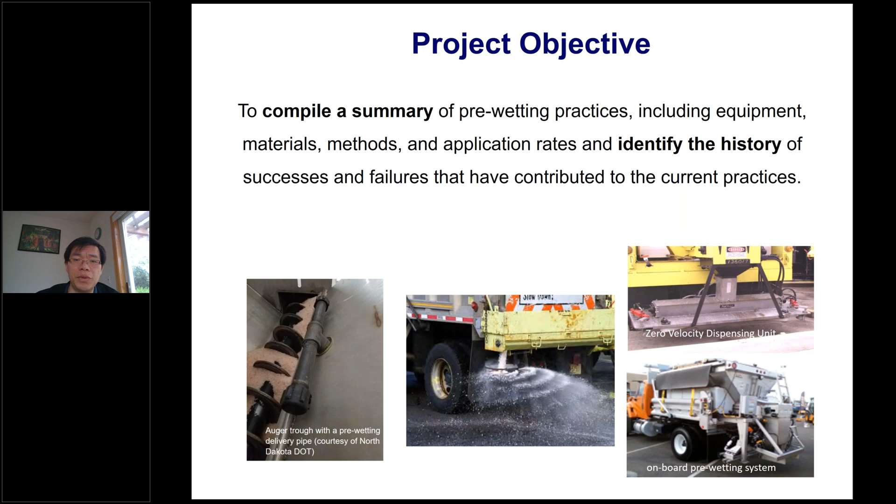Task 1, literature review, basically aimed to review publications from recent decades, looking at the most common practices, innovative technologies, and trends related to pre-wetting equipment, systems, and materials, as well as application rates, application tactics, and the appropriate methodology and equipment to use under various road weather scenarios.

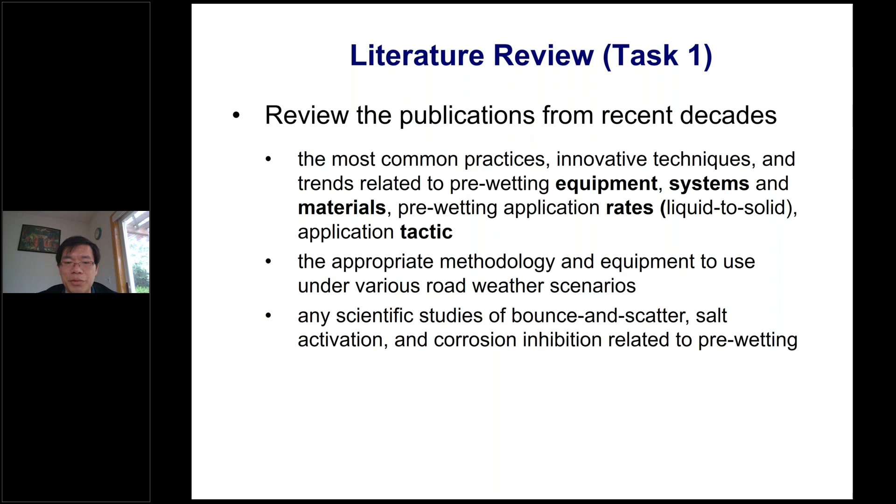For sake of time, I will combine and integrate all the findings into the final synthesis report, so I'll focus on the findings there. But here I'll just briefly go over each task and what was the original objective. For task 1, we also wanted to identify scientific studies of bounce and scatter, salt activation, and corrosion inhibition related to pre-wetting. Of course, if you recall, there's not much out there in the published domain in this regard.

Now task 2 was a survey we developed for online participation. It included Clear Roads states as well as some international transportation agencies. The goal is to capture practitioner insights, sometimes those not in the published domain. We also wanted to collect more detailed information about pre-wetting rates, materials, and equipment, and try to bridge gaps identified in the literature review, as well as collect any technical and deployment data where available, and feedback on what worked well, what didn't work well, and limitations of pre-wetting.

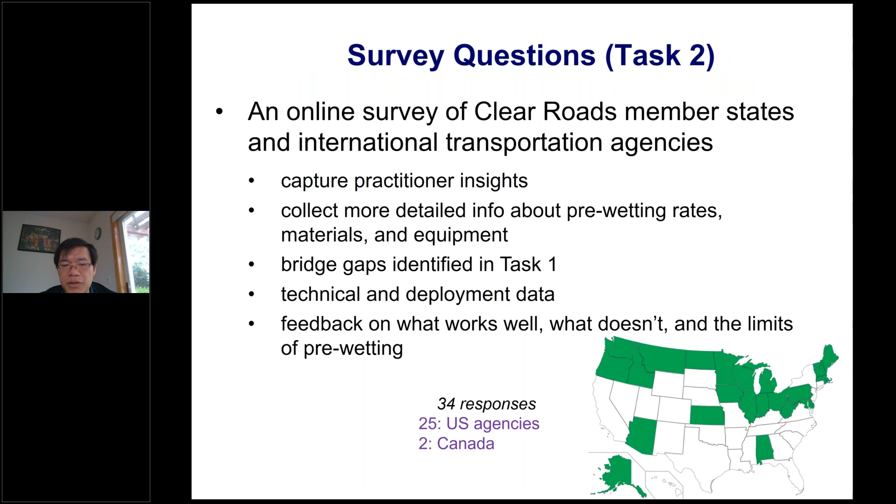So we ended up having 34 valid responses. These came from 25 U.S. agencies and 2 Canadian agencies. Of course, for certain agencies there was more than one response. The map shows where the responses came from, except the Canadian ones.

For task 3, based on what we found out in task 2, we identified a few responses where we wanted to get more details. So in the end we identified 9 case studies. These would provide examples of successful and optimum practices, and also provide sufficient detail for agencies to begin adopting new or adapting existing practices. In the proposal, it was promised 6 to 9 case studies.

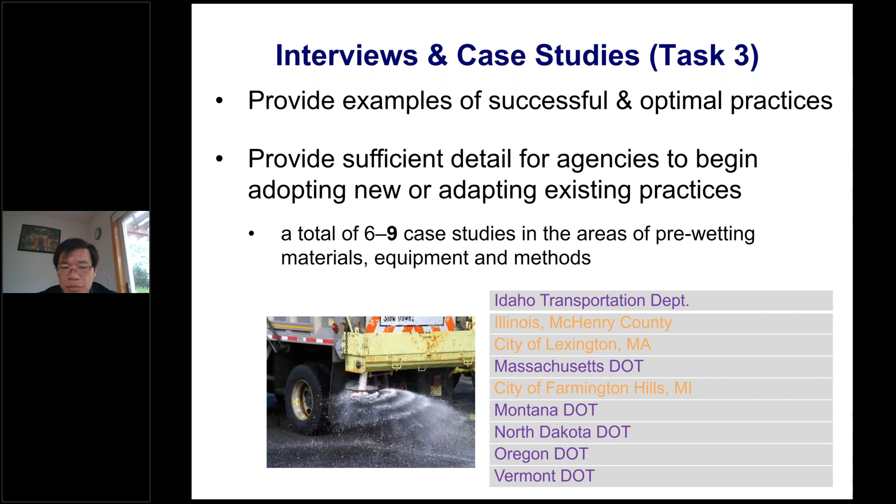Again, we end up with 9. You can see the 3 highlighted in orange are not state DOTs, they are cities or counties. The state DOTs were Idaho, Massachusetts, Montana, North Dakota, Oregon, and Vermont. So that was a good mix of different agencies.

Another outreach activity was task 4, where we reached out to manufacturers. This aimed to identify equipment capabilities through interviews. In the proposal we promised at least 4 manufacturers to be interviewed, and we ended up with 6. Unfortunately, some other equipment manufacturers did not respond after multiple trials. We contacted 10 and got 6, giving us detailed, good information.

So to conclude, this project collected all available and recent information regarding the pre-wetting practice through a comprehensive literature review, an online survey, interviews and case studies of 9 selected agencies, and outreach to 6 identified equipment manufacturers and distributors. It should be cautioned that the following conclusions, presented in the next 20-some slides, should be treated as preliminary guidelines or recommendations, because pre-wetting practice has been mainly based on trial and error and field experience, not necessarily systematic or scientific investigations. That, of course, calls out the need for phase 2.

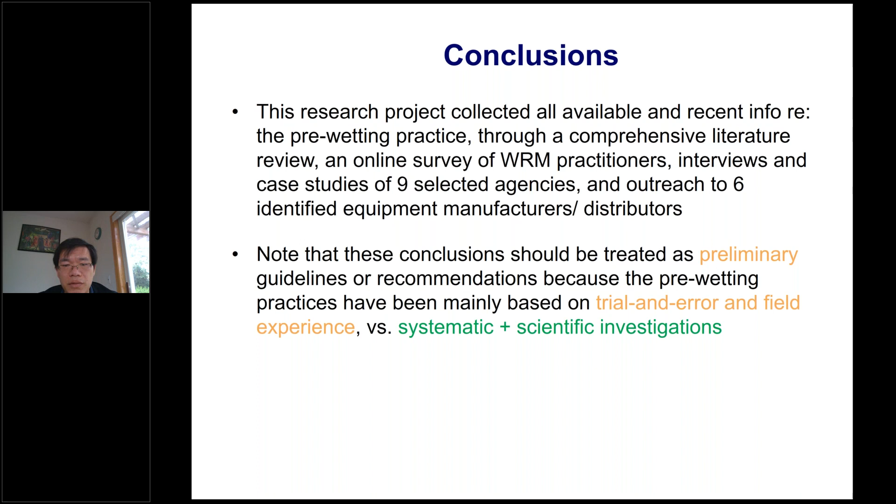The good news is there are many success stories of pre-wetting, and the pre-wetted material stays on the surface longer, has less bounce and scatter, and resists traffic action. One field study showed that 80% of pre-wetted salt remained on a road surface after 100 vehicles traveling at 38 miles per hour, while with dry salt only 15% remained.

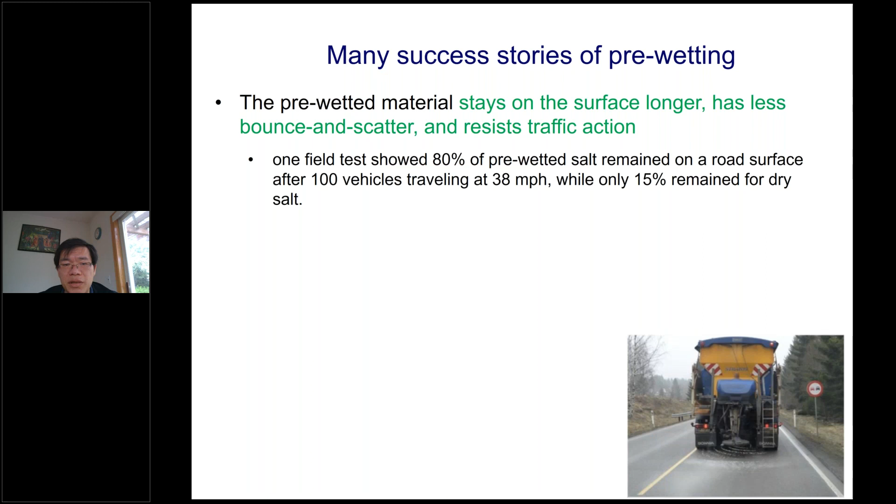Pre-wetting also provides faster activation of rock salt, turning it to brine and accelerating the ice melting process. Field experience suggests typical savings of 25 to 30% less salt required when using pre-wetted salt. But again, that is not a scientific study, it was more based on various agencies' field experience.

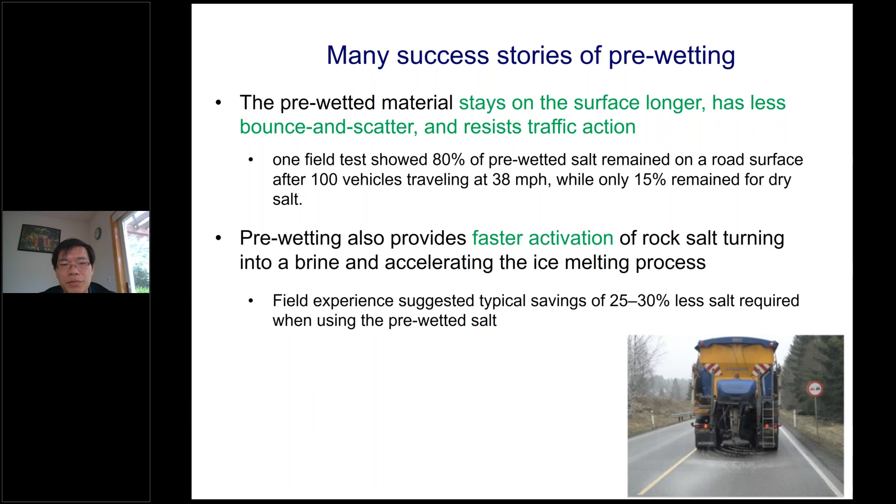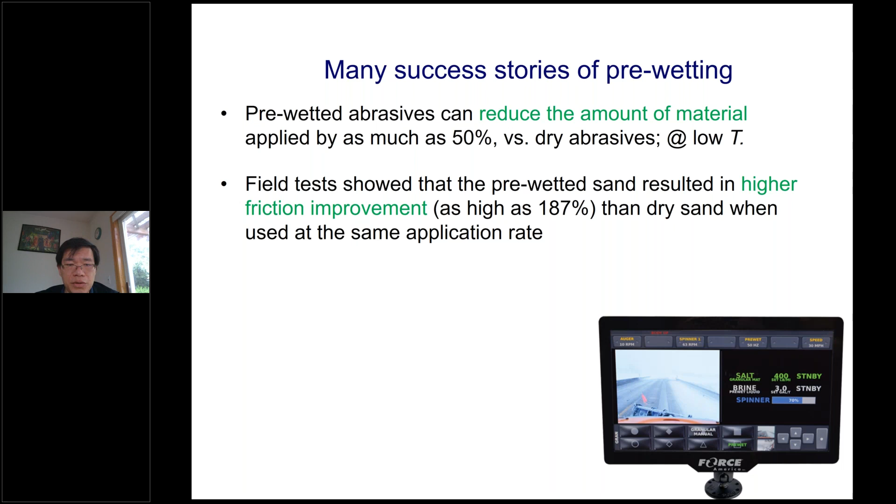Another thing is pre-wetted abrasives can reduce the amount of material applied by as much as 50% compared with dry abrasives, especially at lower temperatures. Field tests also show pre-wetted sand resulting in higher friction improvement, as high as 187% over dry sand when used at the same application rates. The 9 case study agencies also reported that pre-wetting allowed them to achieve the specified level of service quicker.

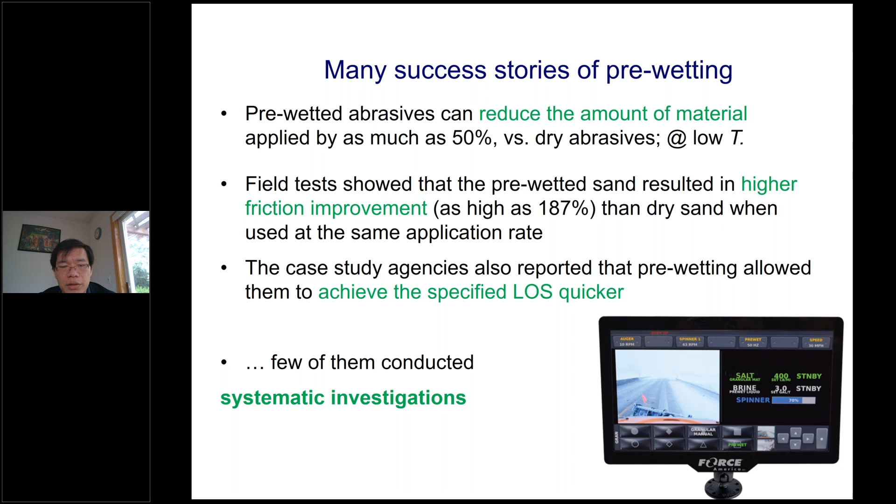Again, the challenge is that few agencies actually conducted systematic investigations with certain statistical design experiments and so on. So it's really hard to have a reliable source of information until we conduct more field tests that are well designed.

Another line of findings looks at what people are using for pre-wetting. No surprises, solids are mostly rock salt and abrasives. Liquids used for pre-wetting are mostly salt brine, 23% sodium chloride, and when temperature gets colder, agencies start using 30% mag chloride or 32% calcium chloride. Over the last decade or so, we've seen increased use of beet juice as an enhancer. There are people using other agricultural waste materials, but beet juice was the main thing mentioned over and over in the survey results and case studies.

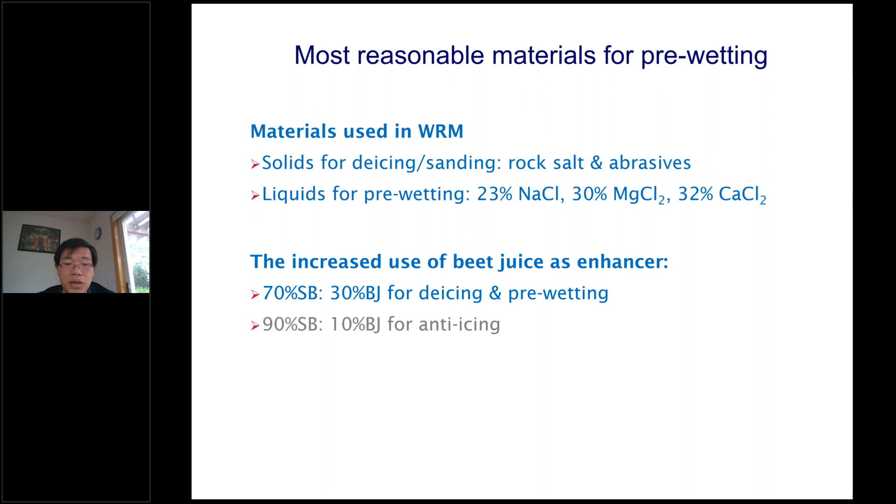Typically, for de-icing or pre-wetting salt, the blend was 70% salt brine and 30% beet juice. But when used for anti-icing, typically it's a 90-10 blend. Many respondents reported using corrosion inhibitors in the liquids for anti-icing or pre-wetting. Again, there's not much research on whether corrosion inhibitors, especially when added to pre-wetted salt, actually contribute to corrosion reduction.

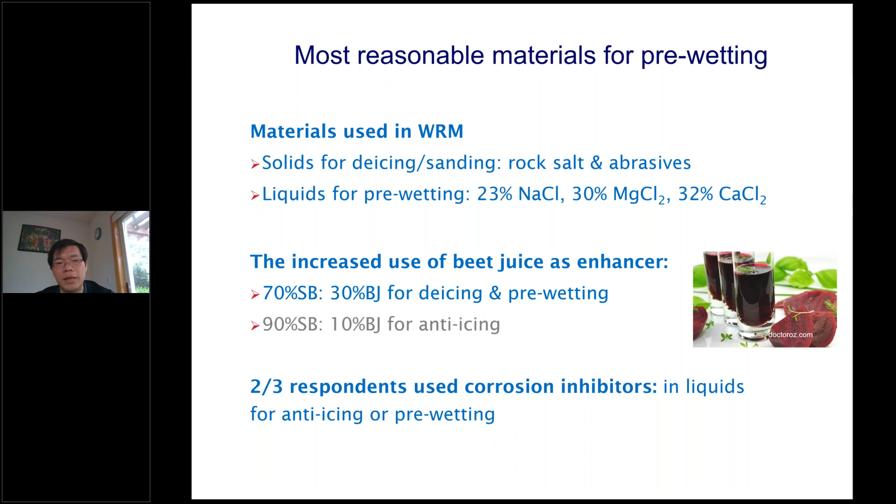The most reasonable pre-wetting rates came from the synthesis of literature, survey results, and case studies. Overall, 8 to 12 gallons per ton is sufficiently effective, though it's still a function of the particle size distribution of the solid, how fine your sand or salt is. In another recent lab study, we concluded that 8 to 16 gallons per ton, at least in the lab, can increase the speed and total ice melting capacity of solid salt and reduce the snow pavement bond.

This is a very scientific study conducted under well-controlled laboratory conditions, so the caveat is you don't have as realistic traffic volumes as you would in the field. From field experience, higher rates are typically preferred. Field experience says we tend to get better operational results, especially under cold temperatures, so we want to go beyond 10 gallons per ton.

That's why some agencies are starting to adopt the slurry application where you go up to 30 to 50 gallons per ton. That's feasible when your truck is equipped with pumps to make salt slurry.

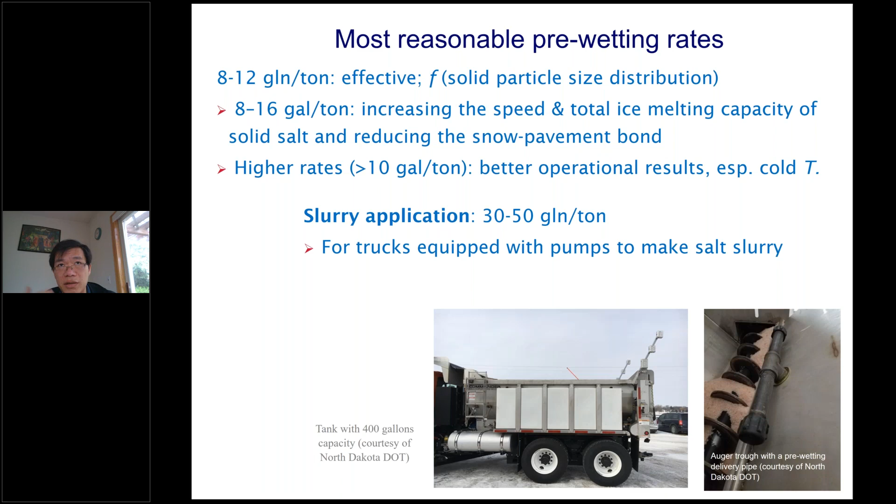Again, this is a matter of truck capability. Some of the older trucks don't really have as much flow rate to allow this higher end of application rate or pre-wetting rate. In theory, we actually only need enough liquid to wet every particle of a dry material in order to have effective pre-wetting, but again, we need more research on this.

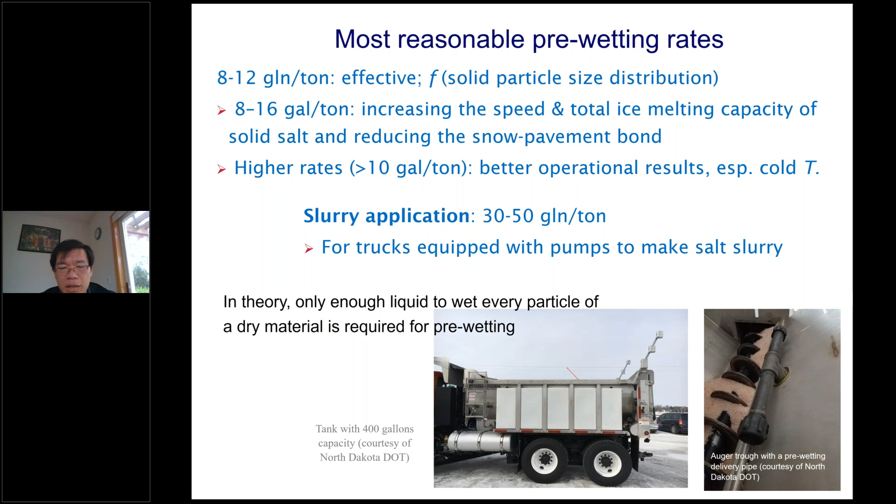One thing people mentioned over and over is we need a greater pre-wetting rate for abrasives. Instead of 8 to 12, probably go for a little bit higher end.

Also, when we look at how the pre-wetted salt is applied on the road versus the pre-wetted abrasives applied, you can see the application rates also differ. Typically, pre-wetted salt, you're looking at 100 to 300 pounds per lane mile, though in some cases you go up to 500 pounds per lane mile. But for pre-wetted abrasive, typically you go up to 800 pounds per lane mile. Again, you could go higher, but depending on the specific situation.

So there are two things to this equation. One is the pre-wetting rate, which is the liquid to solid ratio. The other is the application rate of the pre-wetted material, the solids. In practice, the rate might also be limited by tank capacity, truck capability, and pump capacity. But we should mention that the equipment are advancing so much that these eventually will become a non-issue.

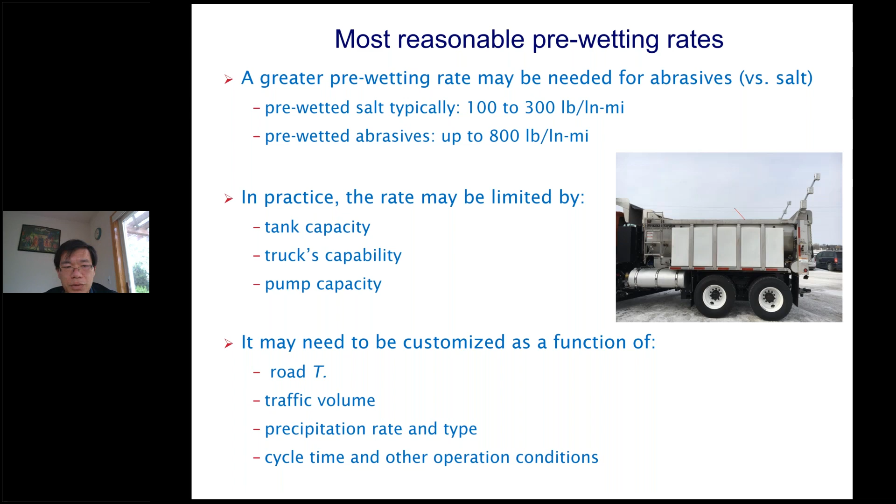Also, the rates would ideally be customized as a function of road pavement temperature, traffic volume, precipitation rate and type, cycle time, and other operational conditions. Again, this is an area we don't have much research.

Now, in terms of most reasonable procedure and equipment, all the survey respondents - 34 of them, I guess - reported the use of onboard system to apply liquids to solids. This doesn't mean they don't do other ways, like purchase pre-wetted salt or pre-wetting at the stockpile, but it looks like the trend is going towards onboard system.

The truck-mounted brine spraying equipment is typically, as you know, a liquid tank, a pump system, the spray bar, and the controller. Depending on the manufacturer or the legacy system, some manufacturers sell the entire system - sell the pre-wetting system to be added to the in-use spreader. Some sell spreaders integrated with pre-wetting capabilities. So it really depends on your agency - what's the legacy system your agency has.

Now, the most effective way seems to be to deliver the pre-wet salt a cross conveyor while the truck travels at 25 miles per hour. That's a very slow speed. So on interstate, you could go up to 35 miles per hour.

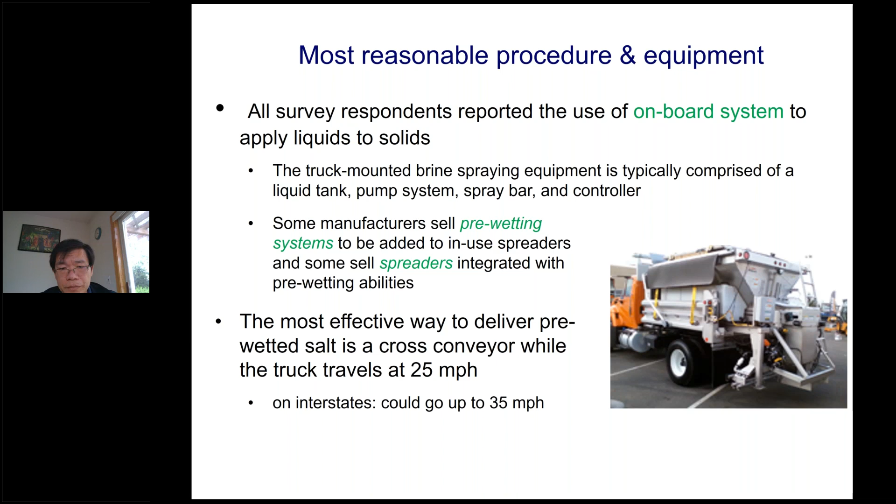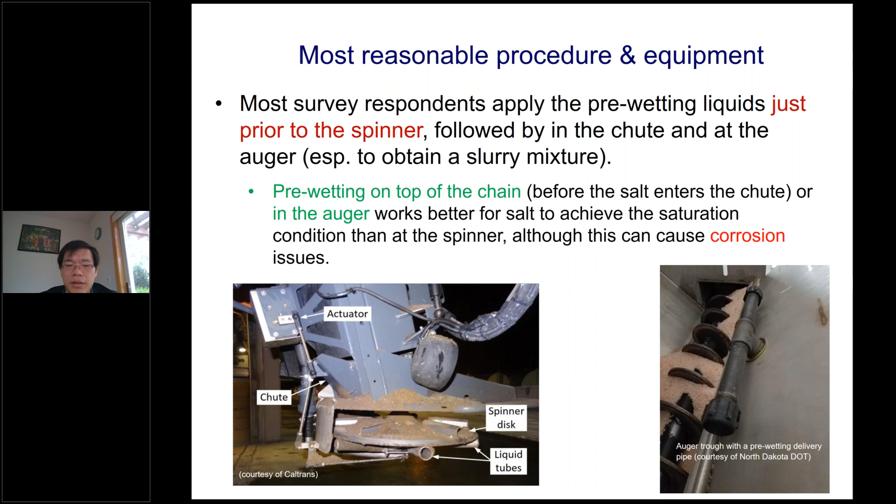Now, in terms of common delivery systems, well, I should clarify that the reason the conclusions are organized in this way is because in the proposal, those are the fundamental questions we wanted to pursue.

So common delivery systems, as you can see, again, spinner is the most common, not necessarily the best practice. But the assumption that at the spinner you can achieve optimal efficiency of the pre-wetting process - I would put a question mark there because again, there's no scientific evidence, right?

Another type is really simultaneous spreading of the solid and liquid before they hit the road. This one you have a little bit more control with the liquid emitter tubes having a directional valve to control the spray pattern. The liquid emitter tubes revolve in sync with the spinner disc, therefore creating a more uniform mixing of liquid and solid materials as they're applied.

Again, all these are based on survey responses. They're not necessarily based on a well-controlled study or quantitative investigation.

It is desirable to include an agitator in the feed system to break down some of the solids. Again, this is based on user experience. One recent development is a technology to crush the salt even further to finer salt, which seems to help the salt stay on the road longer.

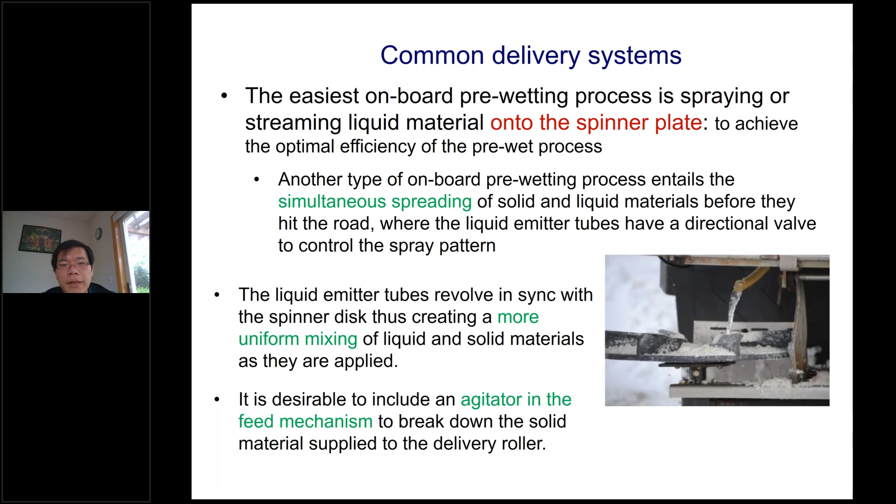In terms of type of pumps, this is a very interesting one because we had back and forth on this. The majority of the 34 survey respondents reported they prefer the hydraulic pump because they think it's easier to calibrate, less prone to corrosion issues, and therefore less maintenance and less downtime of the spreader.

Typically, the old systems or old trucks had electrical pumps with a flow rate capacity of 5 to 7 gallons per minute. That's typically sufficient for an 8 to 10 gallon per ton pre-wetting rate and so on. But for higher application rates like slurry, we probably need higher flow rate capacity. That's where the new hydraulic pumps typically would bring 10 to 18 gallons per minute.

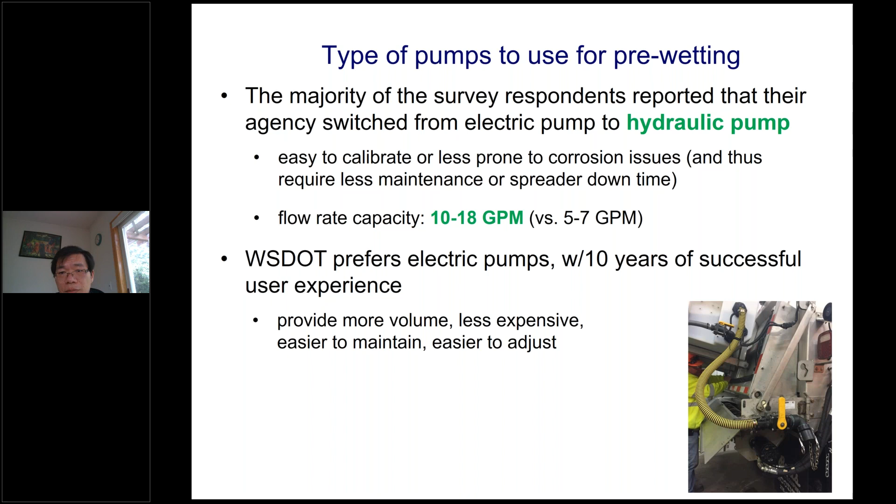However, WSDOT had a different experience. They had electrical pumps with 10 years of good user experience, and they seem to provide more volume, less expensive, and easier to maintain. So again, we may have to look at the specific brand instead of categorizing electrical versus hydraulic, and both technologies are advancing over time.

Some DOTs use a gravity feed system, so you no longer need the pumping. But again, that might not work well for abrasives, just like the zero velocity spreaders. Something worthwhile to look into. Again, no quantitative data available.

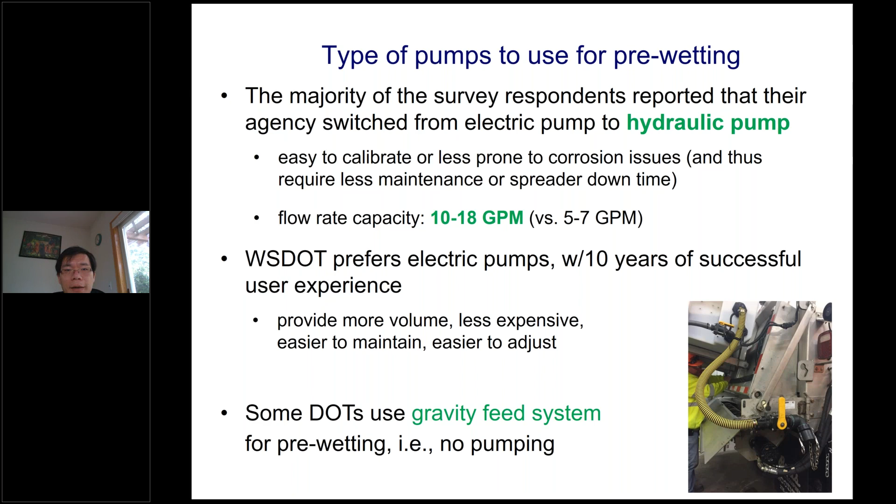We also look at the type of spreader configurations. There are 8 different types identified throughout the survey responses, and zero velocity is at the top because there was a study that zero velocity spreaders and pre-wetting techniques yield bare pavement in half the time of standard methods by reducing salt usage by 70% and salt cost per mile by about 50%. The caveat is the user experience also showed that zero velocity spreaders don't really work well for abrasives. It works well for salt.

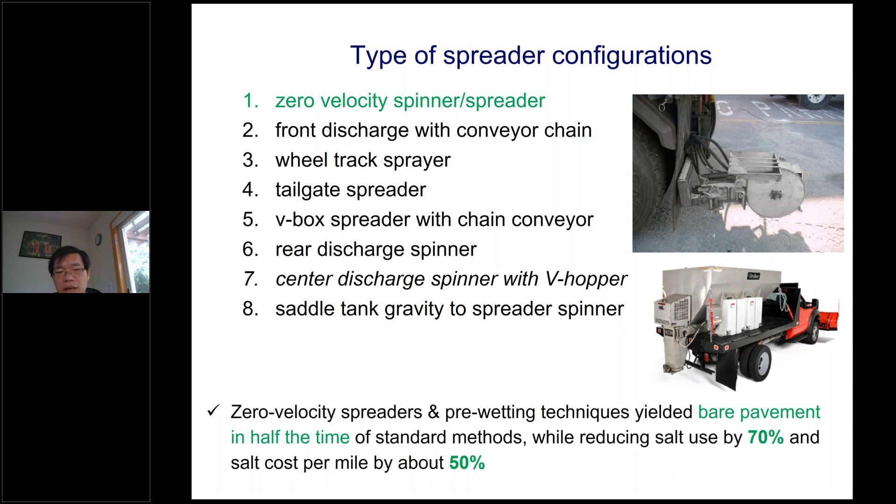As you can see, there are many different types of spreader configurations out there on the market. And if you look at the details in the report, the 6 vendors also provide a lot of information on what kind of spreaders they can offer.

Now, in terms of nozzle type, hose size, and screen size, those are some of the questions. We basically found that there are 2 types of nozzles quite popular. One is the fan nozzle, most common, again, not necessarily the best, that's where I highlight with red. I think the stream nozzles would provide an interesting alternative, but again, there's no scientific data to contrast either one of them. This is all based on user experience.

The most common hose size is 1 inch in diameter. You would imagine if it's too small, then you may have some maintenance issues. The nozzles or the hoses could be clogged easily.

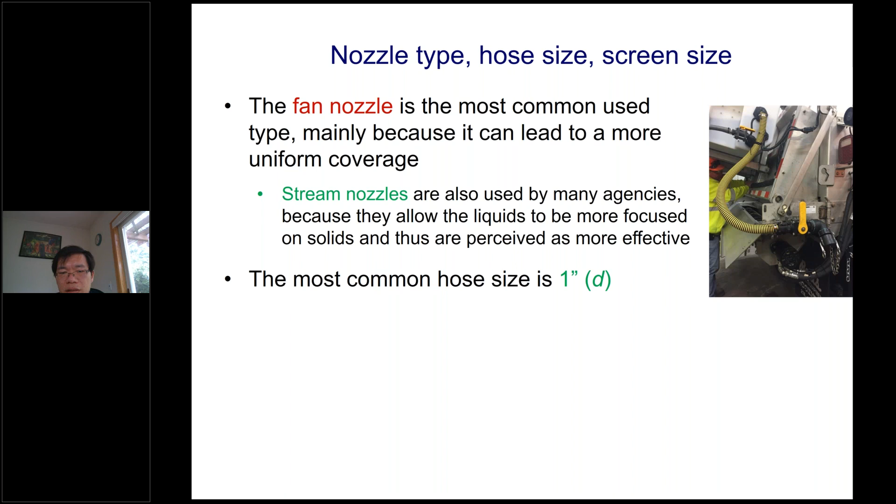In terms of screen size, from the user experience and the vendor information, we're mostly looking at 16 to 80 mesh. Actually, the 80 mesh is smaller than 16, right? So preferably, we can crush the sand as fine as possible. Again, there was an error I need to fix in the final report. So basically, ideally, we can go as small as 80 mesh if you can find a way to crush your sand that fine.

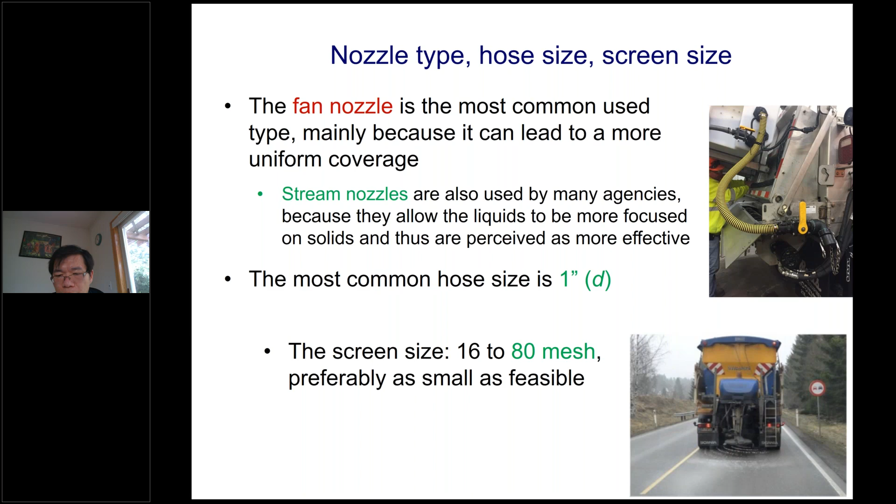There are other concerns in terms of reliability, maintainability, and safety. Most responses say they are as reliable as any other winter maintenance equipment, but the focus is really on the liquid delivery pumps, where agencies have reported all sorts of issues over the past decade or so. Maintenance is crucial, especially at the end of the season, and calibration at the beginning of the season is also important. The nozzle tends to plug and should be cleaned regularly. System flushing and screen cleaning are required at least twice per season. Those would help address the reliability and maintainability concerns.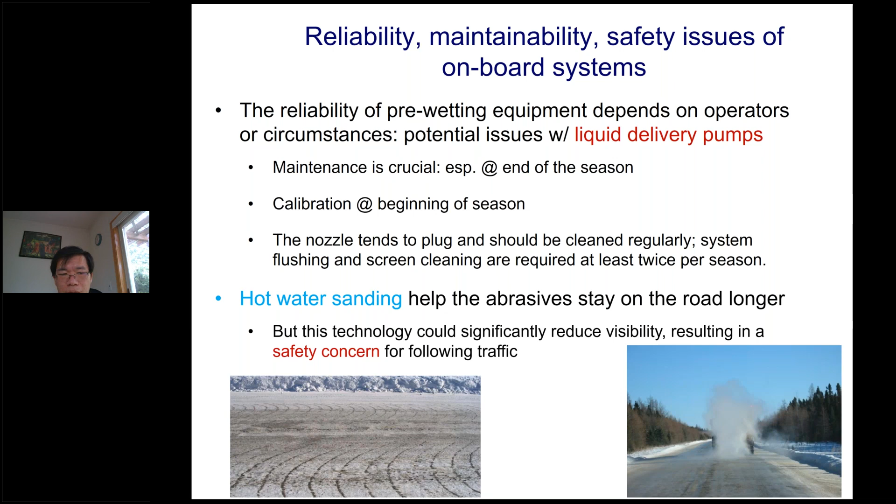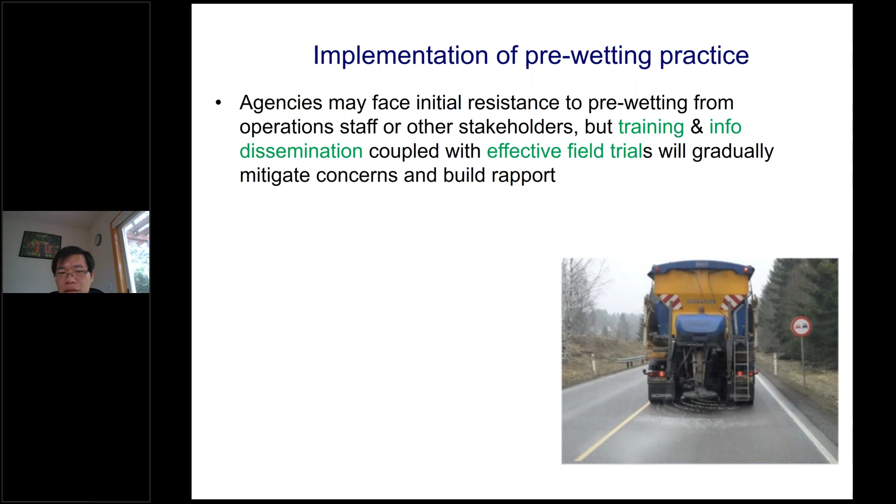We certainly learned a few things from the agencies in terms of implementation of pre-wetting practices. Many of them faced initial resistance from operational staff or other stakeholders like management or even political stakeholders. But training and information dissemination, coupled with effective field trials, gradually mitigated concerns and built rapport for this new innovation. There are some obstacles if your agency is considering transitioning to pre-wetting. Some items mentioned in survey responses or case studies include cost, equipment capacity, logistical challenges, and worker availability.

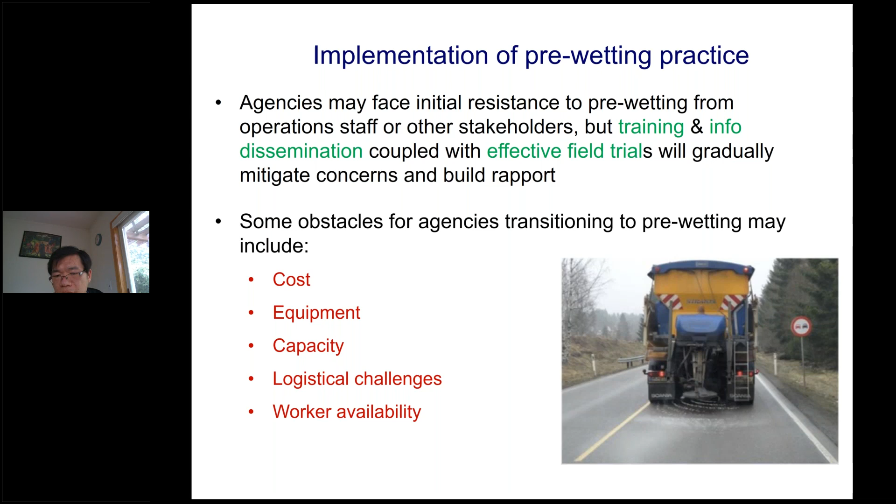We also try to summarize what we identified throughout the literature, the survey, and case studies in terms of recent developments. One of them is new on-vehicle tools such as zero velocity spreaders and modified spinners, which facilitate precise and effective application of both solid and liquid materials.

The second is the use of pre-wetted fine graded salt. Like I mentioned, they seem to stay on the pavement longer, especially when the pavement is not too wet, a little bit dry or moist.

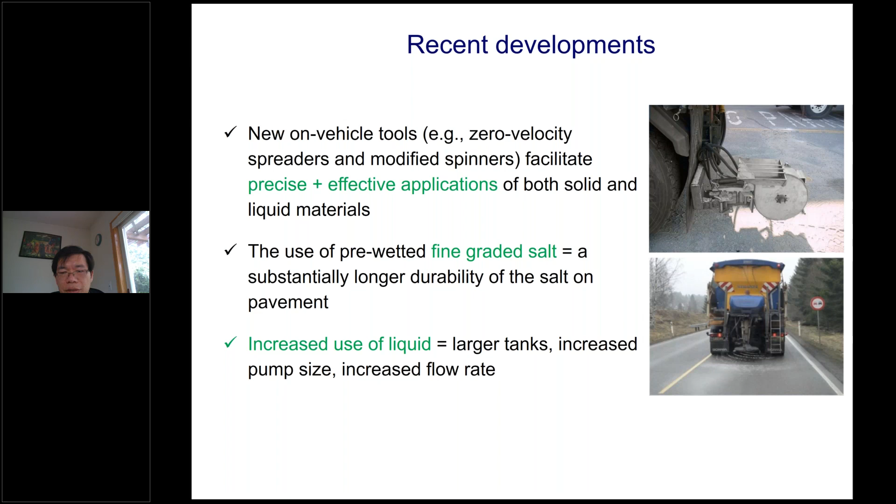Agencies have reported increased use of liquids. For that reason, they're migrating to larger tanks, increased pump size, and increased flow rate. Some agencies reported moving the pre-wetting location from the spinner to the chain or the auger. Most of them also use road weather information systems, automatic vehicle location, or maintenance decision support systems to aid in determining when and how to use pre-wetting.

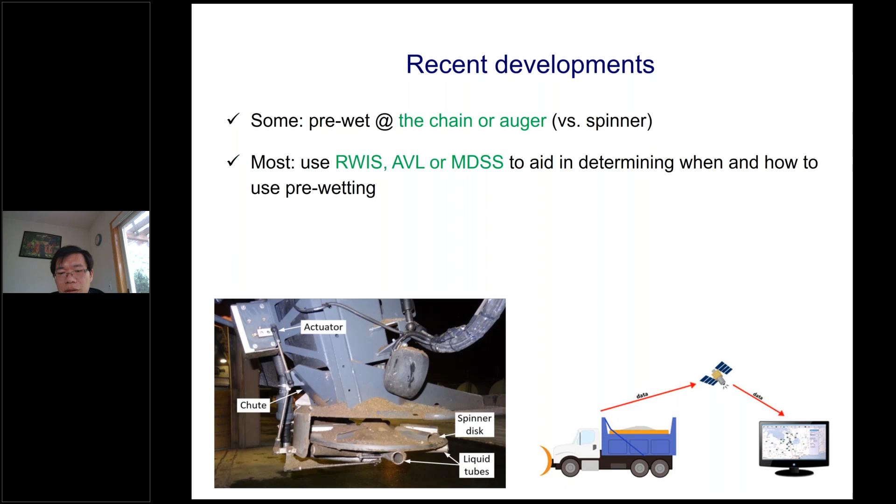I think this kind of data-driven approach will be the best practice in the future. Most manufacturers reported having advanced systems for data recording capabilities through the use of plow cameras, GPS, and so on, so that you have more accountability and more room for improvement.

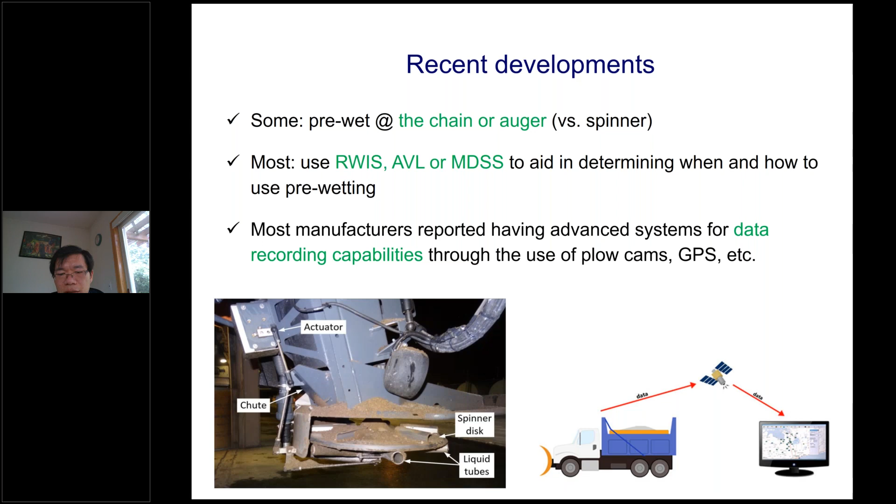For the case study agencies, again nine of them, all have changed their pre-wetting practice since first implementation because of increased understanding, support, and better equipment and technologies. That's a really good sign.

Most of them have also upgraded their equipment to include larger capacity, bigger volume hydraulic pumps, spray nozzles, ground speed sensors, and live bottom V boxes.

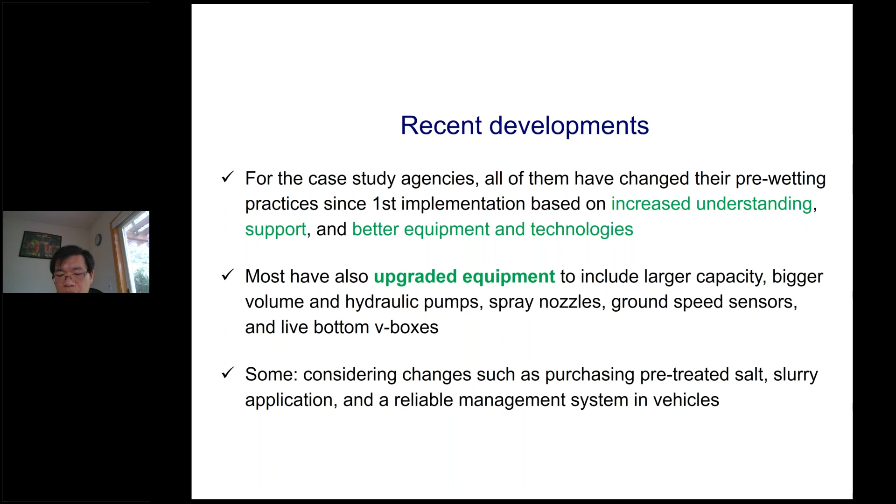Some of them are considering changing to other practices, such as purchasing pre-treated salt, just to have less investment needed in their own equipment, I assume. And also slurry application—as we mentioned earlier, in the field it seems like the higher pre-wetting rate leads to better operational results, and also a more reliable management system in vehicles. This certainly includes some of the data recording or accountability we were talking about in the earlier slide.

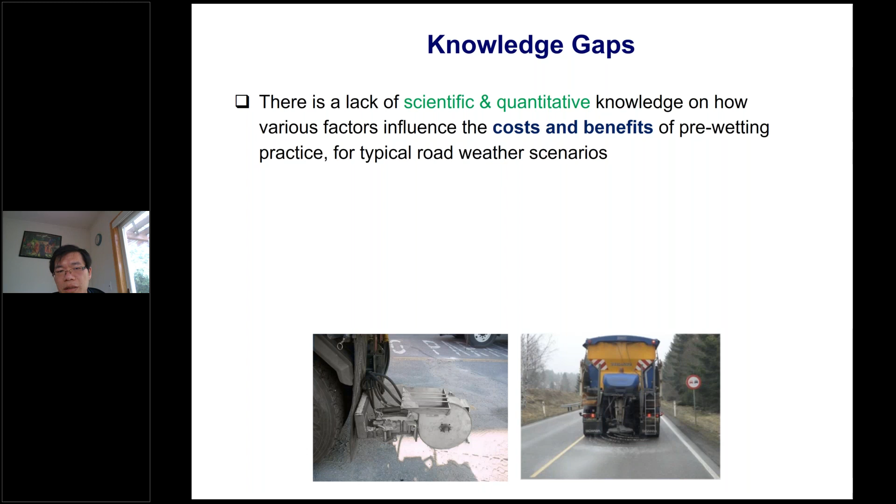Now, what about knowledge gaps? We identified a few of them. One is the lack of scientific and quantitative knowledge on how various factors influence the costs and benefits of pre-wetting practices, especially for typical road weather scenarios. We only have anecdotal evidence—they work well, many success stories—but not much quantitative scientific information.

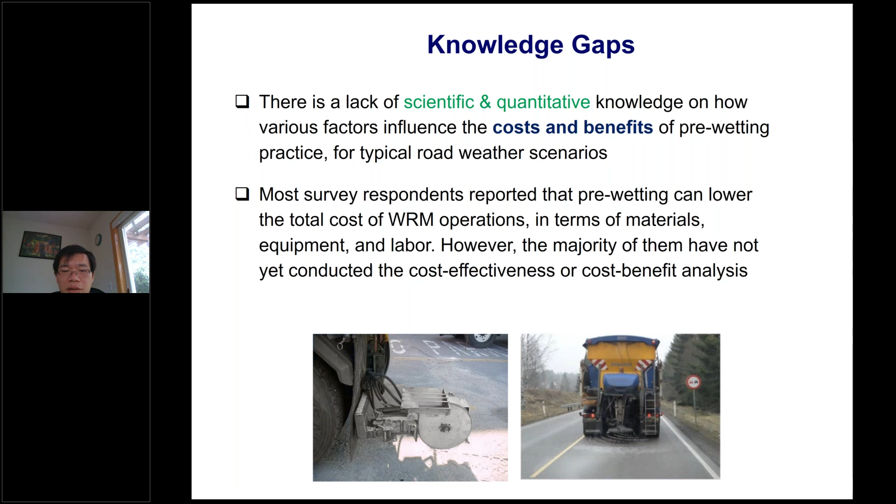Most survey respondents report pre-wetting can lower the total cost of winter road maintenance operations in terms of materials, equipment, and labor. However, the vast majority of them have not yet conducted a cost effectiveness or cost benefit analysis.

The second knowledge gap is that we still need scientific or quantifiable evidence of effectiveness under various pre-wetting operations, especially when dealing with application rate. Even though, as I mentioned earlier, we recently conducted a lab study which concluded that 8 to 16 gallons per ton of salt was doing really well in the lab, the traffic simulation was really difficult because in the lab you don't have as much traffic, and the traffic is much slower than in the real environment.

And in the field, there are so many diverse road weather scenarios. So there's an urgent need to study and optimize both the appropriate pre-wetting rate of liquid to solid and the appropriate application rate of the pre-wetted salt for typical road weather scenarios. That's our second knowledge gap.

Just be cautioned that the optimum rate really depends on a lot of things: climatic conditions, pavement surface condition, traffic volume and speed, particle size distribution of the solids, type of pre-wetting liquid—especially if you're thinking about unconventional pre-wetting liquids such as beet juice blended with salt brine—methodology for pre-wetting, equipment type and configuration, ground speed, and so on. So there's a lot of factors to consider, and that's why it's so difficult to have a very specific guideline for each type of scenario.

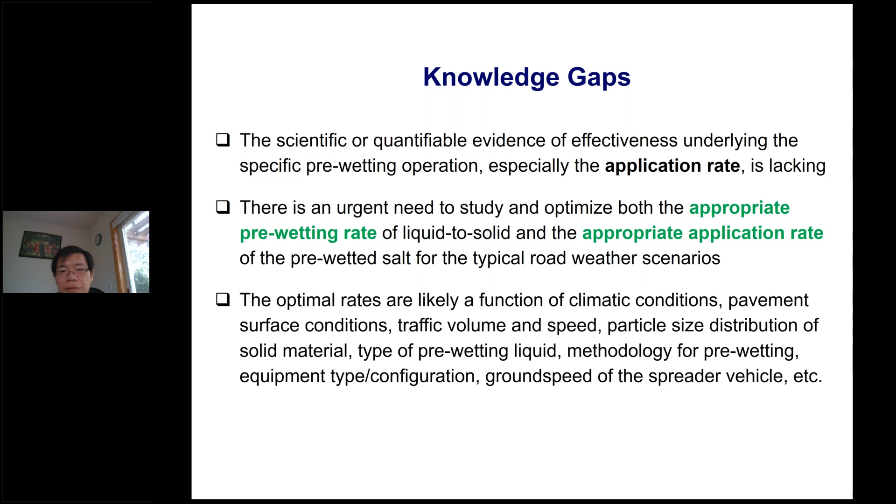The last knowledge gap is really the need for an experimental design that is statistically valid and practically feasible in terms of field evaluation of the impacts of different pre-wetting practices.

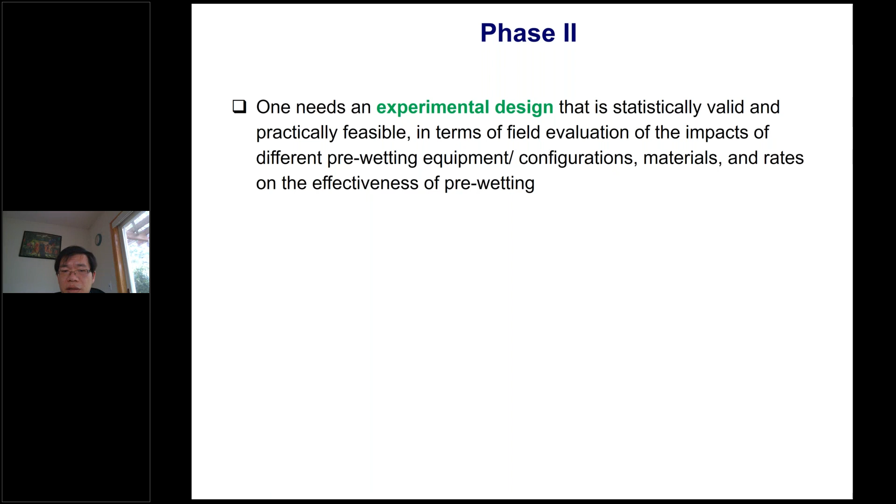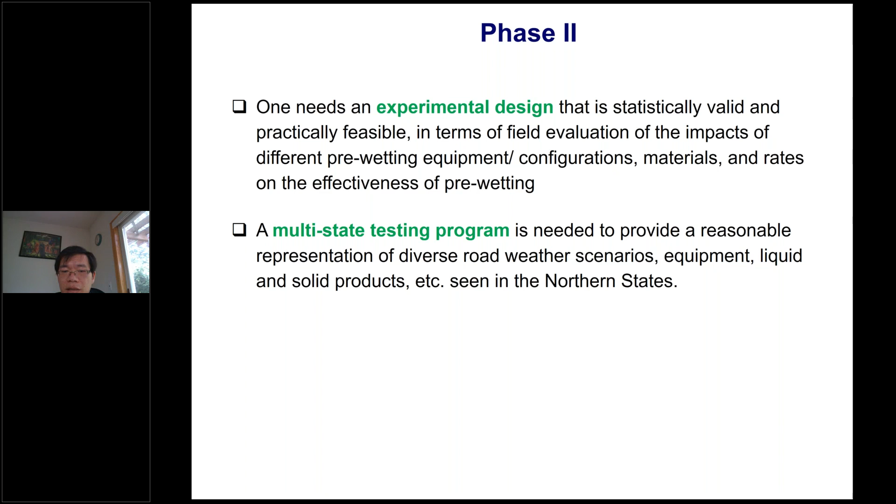Arguably, a multi-state testing program is needed to provide a reasonable representation of diverse scenarios, equipment, liquid, and solid products, especially those seen in northern states.

So that concludes the key findings, and now I hope to hear your questions. Thank you.